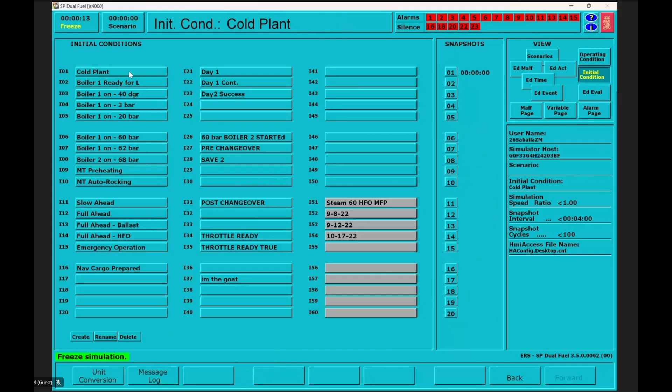Freeze condition. Cold plants. Alright, let's start here. Unfreeze it, run. Alright, timer starts.

Fuel oil service system, start draining these two. Open up this line. We're only hooking up all number one everything. So number one heaters, number one filter. Go through boiler 1, open up the fuel oil meter. Go over here to boiler 2, open up the fuel oil meter. And put this in remote as well as the other one. Number one fuel oil meter, open up, cool. Put this in auto, open up these two.

Now, let's now go to, we're gonna make our way down on each one. Burner system 100 on all of them, 100, 100, and 100. Then we're going to open up atomizing air. We should get 7 bar. Alright, cool. Next one, back. We're going to the other burner system, 100, 100, 100. And as well as opening up atomizing air, 7 bar.

Verify, 7 bar. Cool. Air flue gas system, remote, auto. Now, open these two valves up, turn on this, as well as turn on 1. Oh, we don't have power yet. Alright, going too fast. Open up these two valves, put this in auto, and put this in remote. Okay.

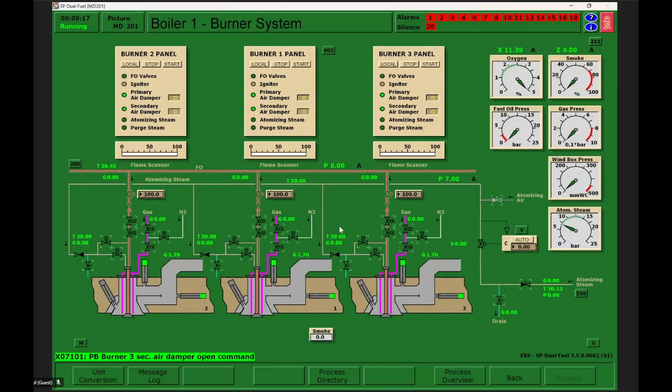Now, burner system. Off, off, off. I'm doing everything remotely. I'm going to open these up. Go to the other side. Look, remote, remote, remote. Damper, damper, damper. As well as this one. Open up also 100%. Cool. They are 100%. This is 100% as well. Okay. Cool. Check my high pressure feed system.

We're approaching, so I'm going to shut this off, put this in auto. Alright, this is good, and this is not closing fast enough, so I'm going to take this off auto, and I'm going to put it to 0. I'm going to make sure this doesn't turn back on. This still needs to fill back up, so that's why this is still filling up. And all right, cool. Put this back in auto.

Now, turn this fan on because why not? We're here already, and this can turn on auto. You can open this up. I'm just not gonna open this yet because I'm not filling up the condenser yet. And now that we have water here, cool. We can start firing. Burner ones, cool. Purge in progress, as well as the other one, purge in progress. Awesome. We're gonna wait for those to finish.

Actually, let me check. Super slow. Make sure this is open. Make sure this is open. Cool. Put this in auto. Burner system. Cool.

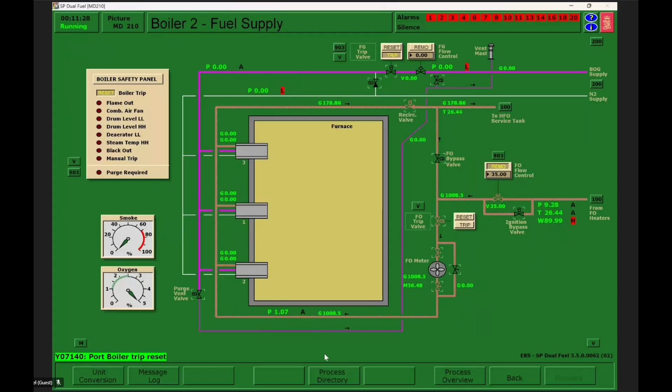And yep, now we could take this reset now that we're filled back up. This should open up now, as well as the other one. We're gonna open that up. Cool. All right. While we're here, we're gonna put this into auto, and keep this to 100%. Put this into manual, and the same goes for the other side. 100% auto, these two, and this one. Okay.

Boiler one burners. It's now fast. Yeah, alright, that's what I expected. Okay. And I'm gonna start this one as well. Cool, it's going fast. If this is going super slow, something's wrong. And just run through what I showed you.

Alright, let's check this one. Alright, this is good. Awesome. We're not filling this anymore, so this should be 0, and I shouldn't be getting anything from here. If you go through here and you see they're pulling water, you're losing water somewhere. Okay. Purge complete. Start this first burner.

We're about to hit 12 bar, and then we can start introducing steam into the desuperheater and then into the desuperheated steam line. So we're gonna open this up now while we're at it, and then as well as the other side. We're gonna go here. We're gonna open up these two valves. It says to slowly warm the valves. Yeah, we're not doing that. We're gonna introduce steam right away.

Wait for that to open 100%, then that should be at 12 bar by that point. Alright, cool. Wait for that to go to 12 bar, and then we'll open this up. Okay, I'm gonna open this up. Open this up first to equalize, and then this will open up. Then you can shut this. We're gonna do the same for the other side once it reaches 12.

Remember, watch this temp, make sure it doesn't rise. This one as well, cool. Alright. Crazy drop in temperature. We can put this in auto now. Alright, now to the other side. Basically almost there, just wait. Alright, 12 bar. Open this up.

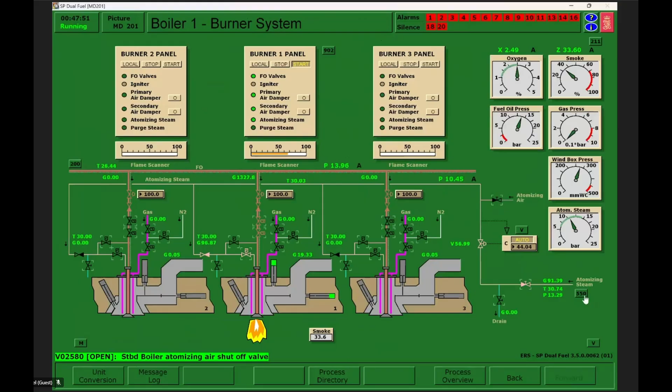When this drops down low enough, we're going to bring up this master command, this energy command. Sure, we have good stuff here. Alright, steam dump line is good. This is good. Alright. And then our atomizing steam. Auto. This should rise up. That's good. We can cut that out, as well as the other side. Auto. Open this up and cut this out. Cool.

Alright. Boiler pressure, steam. What was it? Steam temp outlet. Alright, cool. This up to 30. 30. As well as the other one. 30. Okay. This one's building pressure. Cool. These all should acknowledge. They should all cancel out once it reaches 9 pressure. Alright, cool. This is good. Everything looks good here.

Next part is 30 bar, which we're gonna have to do turbogens and feed water pumps. We're gonna bring our condenser online. Open this up so we can get some water into here. Open these 4 valves up. Turn on this pump right here. We're gonna have a recirc anyways if we have a problem. And open up these right here. 1, 2, 3, 4. Right here. Open this one as well. And yep, there we go.

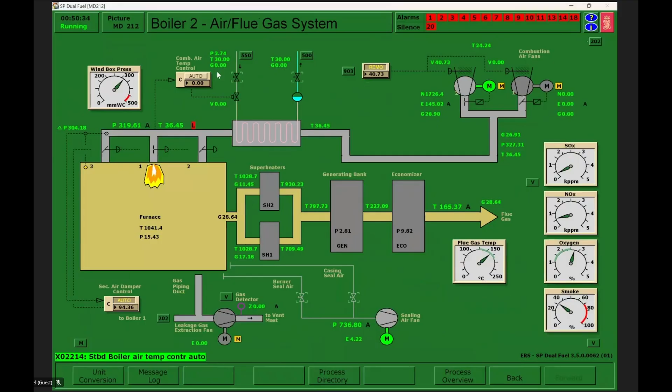Our boiler air heaters, you can open that as well. Put it in auto. Same with the other side. Open those up. Put those in auto. Cool. And just make sure you check. Should rise up. Put sealing water, spray water here. We could actually take off spray water here now because we're using the condensate pumps. Kill this right here.

We can close this to open this up because now we're using the main condenser. And we will actually close this now. And shut those. And shut this one. And shut this one as well. We'll come back to that in a moment. Alright, we can bring this up to, I don't know, that's good, that's fine. And that's fine as well. Okay. Okay, open that up.

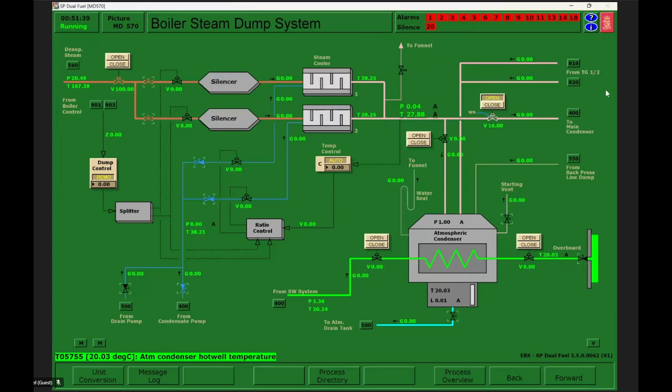Now that we're approaching 30 bar, we can get our turbo generator ready. We're going to open this up now. This will be the last thing you open up. Open these drains up. 1, 2, 3. Open this main condenser up. 2 main condenser. Leave the 2 atmospheric condenser closed. Open up number 1. This valve, these 2 valves. And make sure there's flow here. This should come from here. And then turn on the starting pump.

Open up the gland sealing pressure control and go to the other side and do the same. Open the gland seal pressure control, open up these valves, open up 2 main condenser, open up number 1 and these 2 valves as well as the cooling water. And once everything is good, awesome, open this one up as well actually. Alright, cool. Should go all in here. That should go in here. And then start this pump.

Cool. Now, then our feed water pumps. Open this up. 1, 2, 3, 4. Open up these 2 recirc lines, the main lines as well. Open up this as well. Number 1, the cooling water. These 3 valves right here. Cooling water right here. Cool. And then these remain off. They won't turn on until this pump turns on.

Alright, you can put these in auto now. Typically, the only reason you keep it in manual is that if you put it in auto at the beginning, it's going to jump up to 45. 45 is the max energy command for one burner. That's going to overheat your steam temp, and it's going to trip off. So that's why I keep it at 10, then incrementally increase it. Until it doesn't need the full command, I keep it in manual, and then after that I'll put it in auto. Alright, now we're just waiting again. A lot of waiting.

Alright, we're at 30 bar. Now, head over here. Open up auxiliary line here. Open this up right here. Auxiliary line. Open this up, as well as this one. Looks good here. Watch this as this slowly increases. This valve is open, this one, and this one. Alright, cool. I'm gonna open this up as well, because why not? Okay.

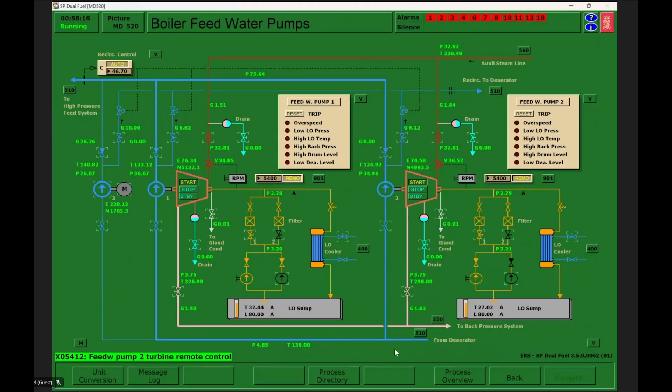Now that we have 30 bar here, I'm going to turn on both of these. So start this one. This should start up. And then I'll do the same for the other. Cool, they're both running. Put them both to remote. Now head back to boiler control. Check your temps, all good, all good. You can now shut this to 0 on both of them. Shut it to 0.

On your turbo generators now, we have 33 bar pressure. This is enough to start it, but this is not enough to use it. So right here, start with 10. Actually, reset. It has to get off the red line for it to reset, and then open this one up. Open this up to 10%. Bring it up slowly. If you bring it up too fast, that vibration meter will go up high and it'll trip it off again, and you'll have to do the whole process again. So just start with 10 and bring it up incrementally.

10, 10, open up this drain. Don't forget that drain. Awesome. Make sure there's steam, condensate coming out of here. And alright. Go to the, as well, go to the, right here, not there, right here. You can start putting it to the main condenser now. You can put these in auto as well. And you could put these two in auto, you could put the burner control in auto.

I'm getting an alarm here. What the hell? Alright. There's no rush here because I'm not at 60 bar. I'm not moving on to the next steps, so I can hang out here as long as I want to. Alright, valve is closing. Bring this up to 100%. And alright, everything looks good to me. Check everything real quick.

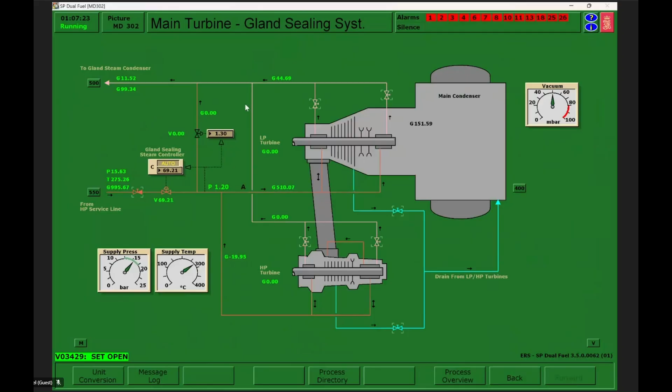Cool, cool. We're gonna bring up heating on this one. Heating valve. Open up these two, this one. Open up all these drain valves. And leave the isolating valve off. Actually, open that isolating valve. And this is gonna remain closed anyways, so it doesn't matter. Go here. Oh, not that one. The other one. And open up all these valves. The drain valves, two gland condenser, as well as auto. They all come over here.

So, let's check our main condenser system. Alright, we have water in here. We are not pulling any water here. We're not wasting anything. Nothing's being dumped out. Okay, now at 50 bar, this alarm is off. Bring this to remote, take it off local. Same for the other side. Take it off local. Go to the electrical system. All you gotta do is sync it in.

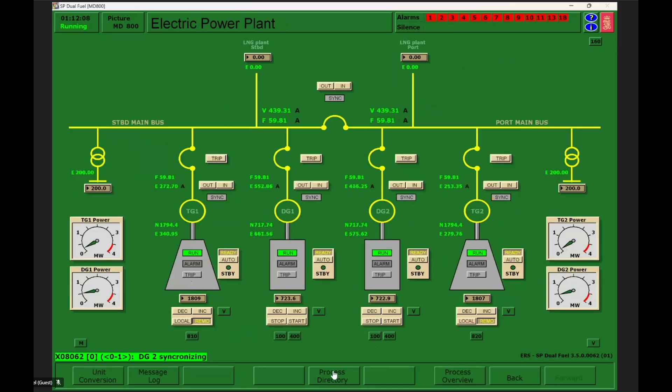Okay. All good. You can bring these down. Doesn't matter to me. Do what you want. I'm gonna leave them up. And there we go. Both turbos online, both feed pumps online. Last thing we need is this main turbine and then boil off gas. And also these distillers.

To prepare for that, get this main turbine set up. So, throttle control system. Open that to open this one, and open LP steam gen, high pressure steam, bleed steam. Okay, cool. Make sure this is open. Cool, cool, cool. And drain heat system, we should have opened this already. Open that up. And gland sealing system, that should have been opened up. Cool. And lubricating oil system.

1. Lube oil cooler 1. Auto. Filter 1. Then turn this on. Should get good lube oil pressure outside of the red. And put this in auto once it's outside the red. Okay, this is gonna start slowly coming down. Just use the makeup valve to bring it back up. No big deal. Click 304 here, and this is the number one, and turn this on. You should see supply pressure go to the green, and go ahead, turn this on, put this in auto, and reset this. This control pressure should go back up.

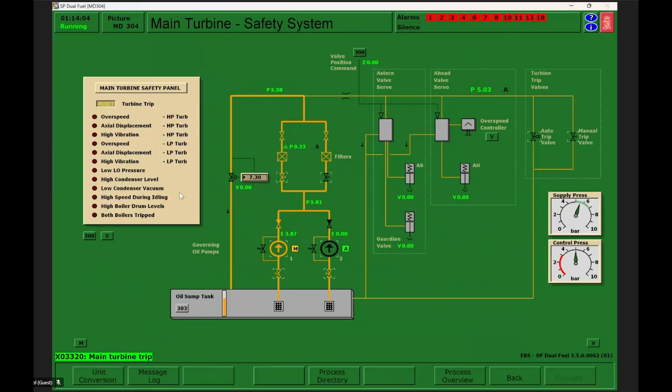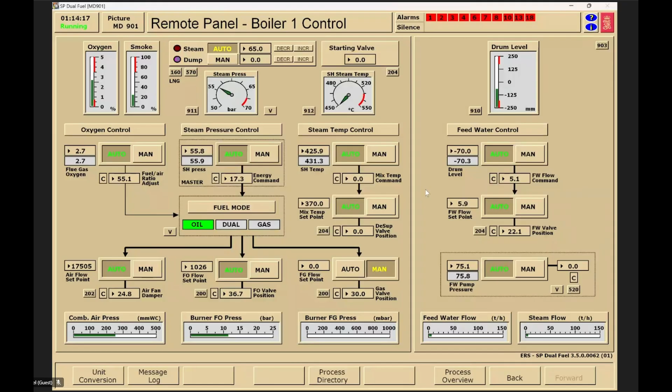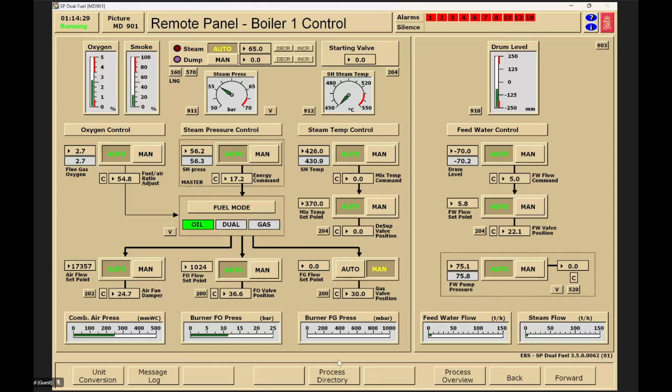Now we just wait. Preparing for that, we're going to go to boiler steam. Boiler steam lines, we're going to open these up. Yep, alright, they're already opened up. And get ready to put steam onto this line right away.

Go to the water steam system, open it up. Alright, it's already opened up. And this is opened up. Same for the other side, open it up. Watch this as it comes up. 17, 18, 19, 20, alright.

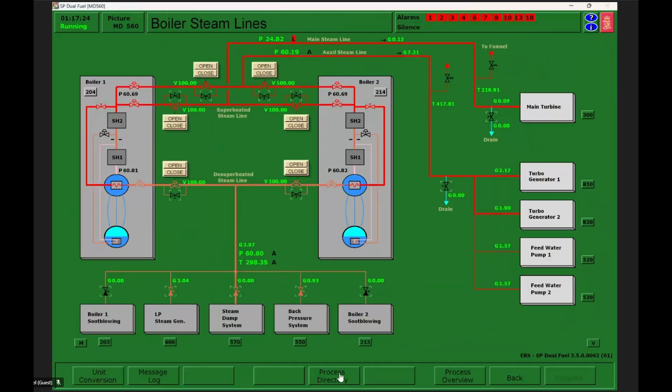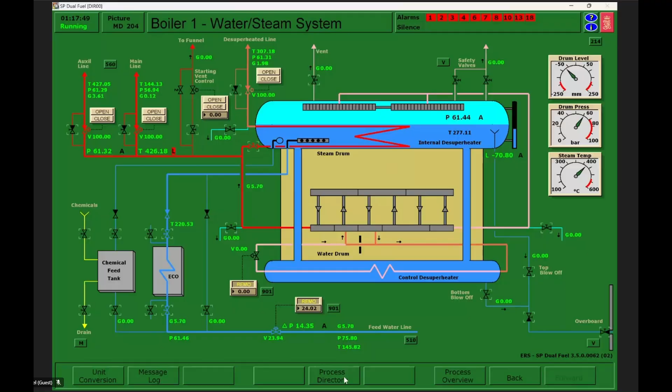Head back here, boiler 1 controls, check temps, check pressures, check temps, check pressures, check levels. Alright, cool. Water steam system. Check everything here, make sure we're not pulling unnecessary water. Awesome, everything looks good. Main turbine 61, alright, cool.

Last check here, we have 57, 58. Wait for it to come to 60. Put this in remote. Here, here, here, here, and make sure everything's good. Drain valves open. This valve open. These two valves open as well. Good. And gland sealing system, everything's open. Awesome. Lubricating oil system lined up. Good pressure, good temp.

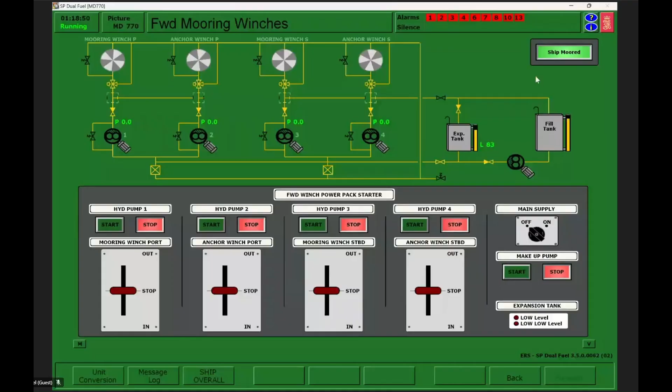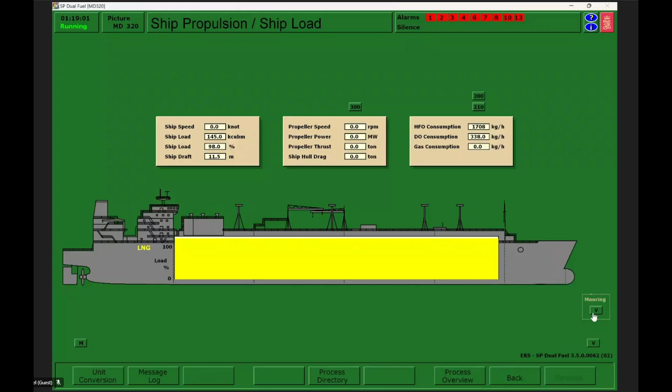Safety system, everything reset. Good pressure, good pressure. Ship no longer moored. Good. You can also check here. You'll see a line for the mooring. Go to main turbine and put this in auto. Warm up. This is going to roll forward and roll back. Same with the back. Roll back and then roll forward.

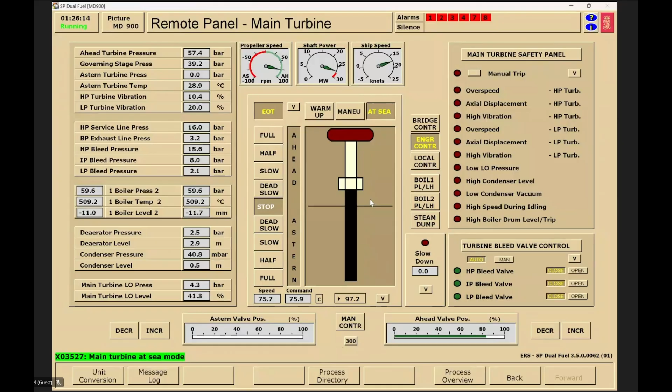Alright, you can put that to sea now. And as well as go to your main condenser system, open up the low sea chest, open up the water scoop. MGPS, you can close once this is fully open. You can close this. Actually, you can close it now. You're fine. And open this up as well.

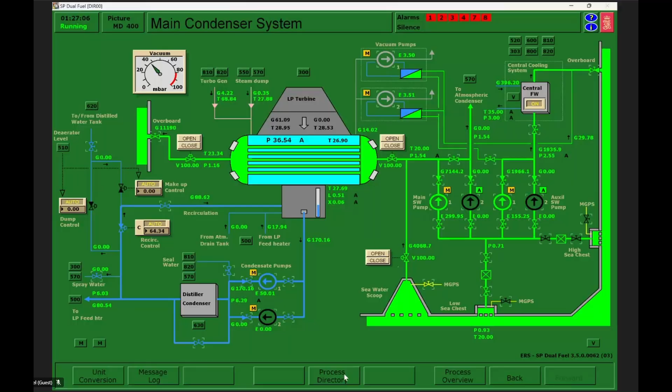Alright, bleed valves are open. If you look here, this is one of your bleed valves. Looks good. Your other one is going to be at the condensate cooled distiller right here. Turn on, line this up. Open the chemical as well. Open this as well. And open up these main condensate lines. You can shut this off.

Open up the vacuum. Start getting vacuum in here. You're gonna get an alarm when you turn this ejector pump on. Oops, open this overboard on. Line up this drain pump, open it. It's gonna come from here, back up. These two are gonna alarm. You're gonna shut off later. And bring this up to 50. Don't bring it to 100, because if this goes anything higher than, I believe, 50, it'll recirc.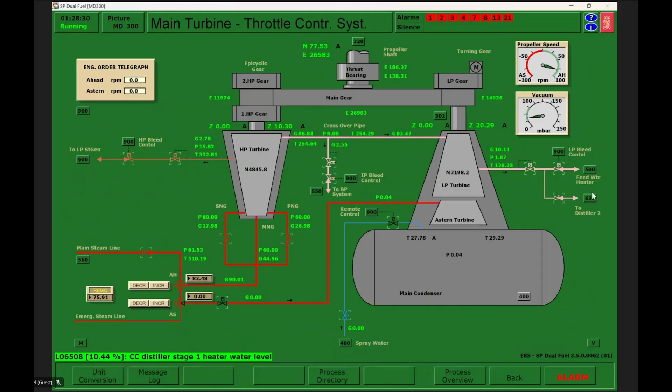So your distiller is right here. And then your feed water heater is right here. Alright, there's our tank level. Just open up our makeup right here. Cool. Condensate cooled distiller. And put this in auto. Same good, and open this one up as well. Open this up, this one, these two. This chemical tank, these two as well.

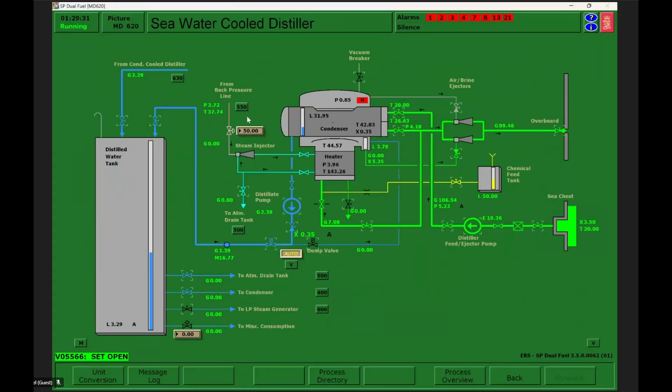Turn this on, start getting vacuum in there. And open this up as well. Put this in auto, turn this distillate pump on, put this to 50% as well. This is going to alarm, that's fine. Open this up. Cool. Alright.

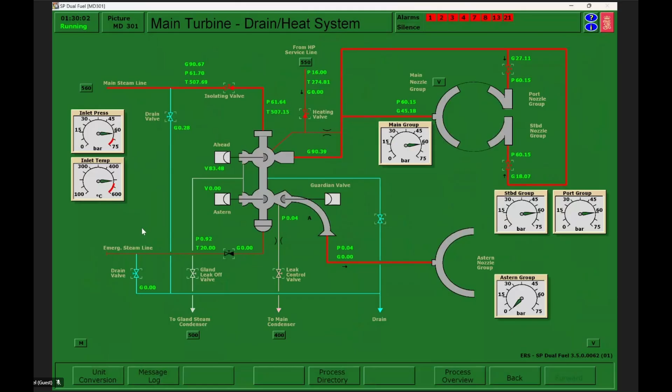And also check your general service steam system right here. This should be shut off because we're getting our steam from the bleed steam. You put this in auto. Okay. Just verify everything here. It's just our condensate cooled system. Our lube oil makeup, that's going up. 13 should go away soon, and then everything else is alright. Cool, we can do our HFO now.

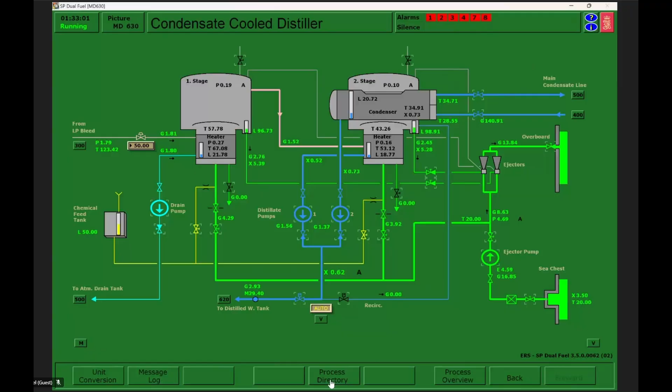Alright, cool. You can now shut this off, and you should be fine now. Awesome. Okay, cool. Go to our condensate cooled distiller. Everything looks good here. This is fuel gas, fuel gas, fuel gas as well. Alright, so the rest is fuel gas. Alright, last step. Let's see here. Fuel oil service system. Make sure that settles out. Cool. As this increases in temp, we should not have a problem at all.

Alright, boil off gas. Sheesh. So there's forced boil off and then there's like normal boil off. I'm gonna go ahead and do forced boil off so you can just get on full gas. If I can remember this correctly, forced boil off there. Here, auto, put this in auto right here. Auto here. Actually, hold on. Turn this on. Open this up. Open these two up right here. Put this in auto. Okay, cool. Oh, my bad. 60 right here. Put this to 60.

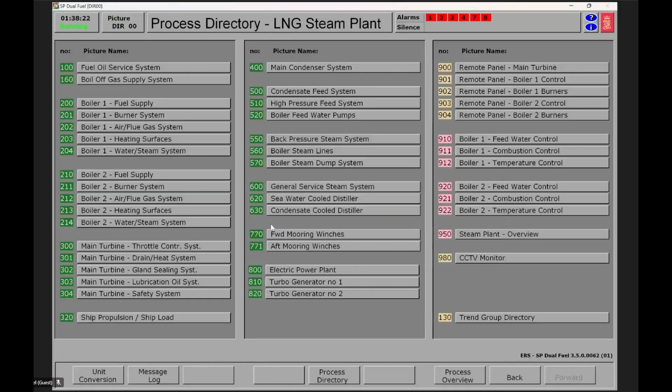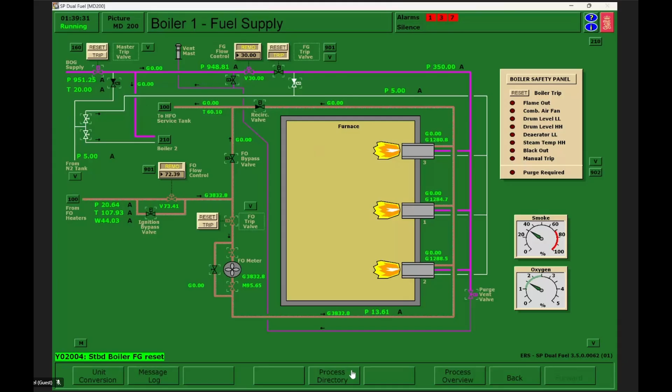Oh, shit. Oh, yeah. Sorry, that's, oh, I'm blanking out. I'm supposed to reset this. Fucking hell, huh? Jeez.

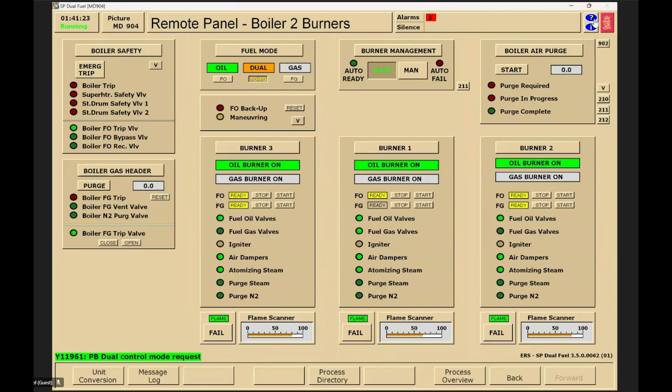Alright, once this is open, this is going to be ready. You can put on dual. Same with the other one. On dual. What am I getting here? Okay. Once you're on dual, you can check it out here. Burner system. Once you're on dual, you can put it to fuel gas. Change this to auto, as well as this one to auto as well.

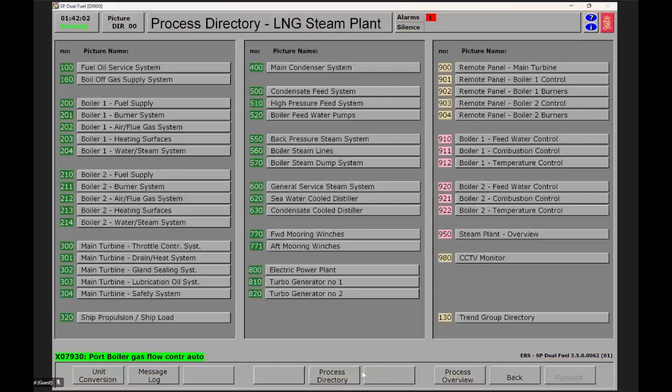Make sure this fuel oil backup is ready, because if it's not, then it can't go back to oil. But it won't let you go in gas anyways if this is not met, so don't worry about it.